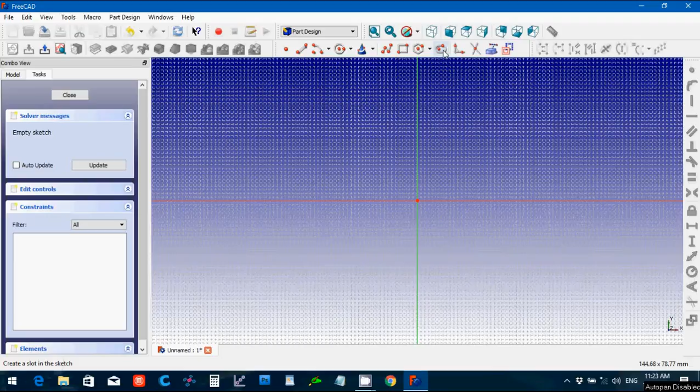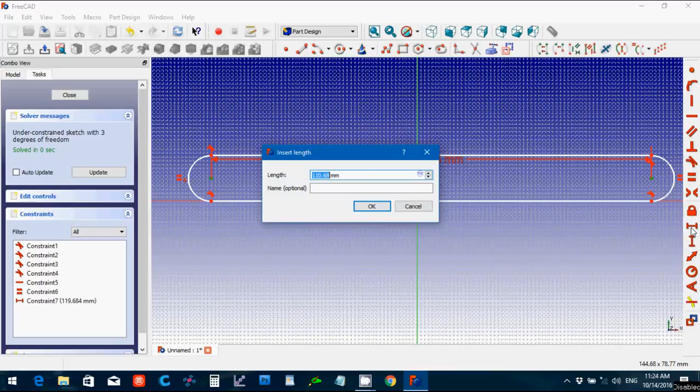So we're going to start out by creating a sketch, and I'm going to go ahead and leave it at the XY plane, and we're going to use the slot tool because it's the easiest way to create the original part. We're going to click here, and give it a distance of 304.8 millimeters. My number is now 304.8. Okay.

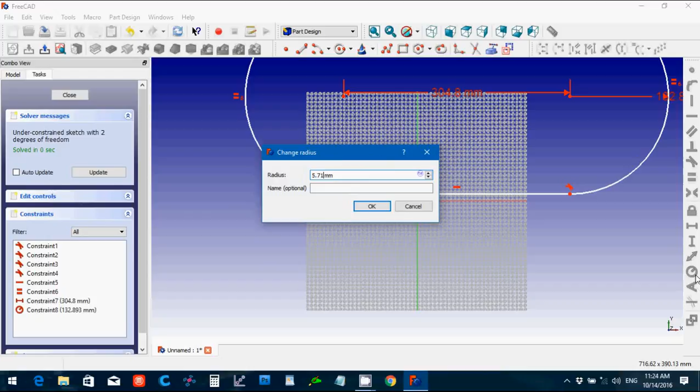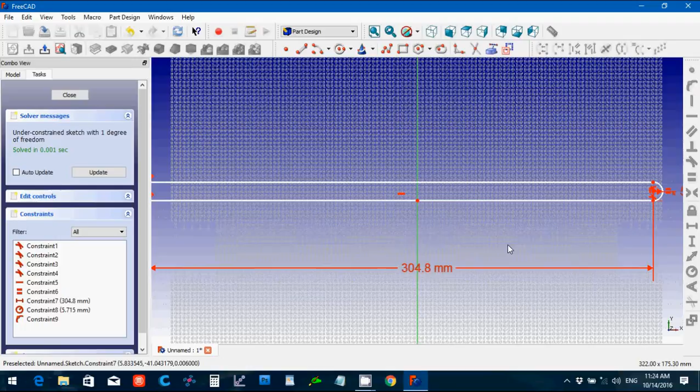Make it really big. We're going to set the radius on one of these to 5.715 millimeters. Now we can bring this back over here. I'm going to pin it to the, and then I'm going to go in, let's move this. So I selected that point, and now we're not done yet. That's just the outer part of it.

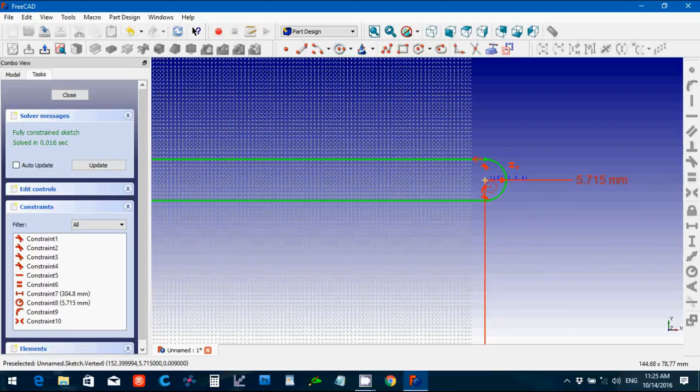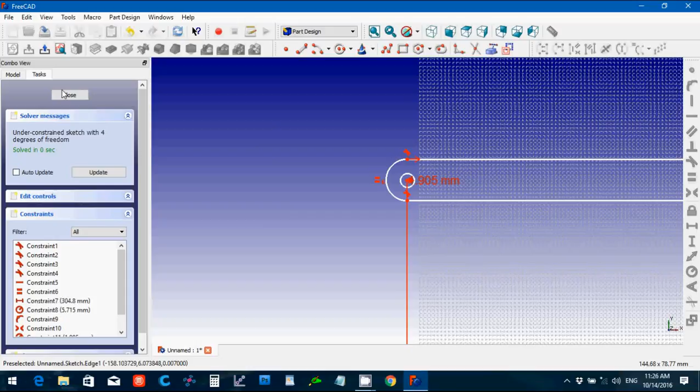We need to make two circles. One pin to that. We're going to hit escape. Let's go ahead and set the radius on that. And the radius of that is 1.905 millimeters. Now these may sound like really weird numbers, but they're all converted from inches. So set the radius on that one. 1.905. Then we can close that.

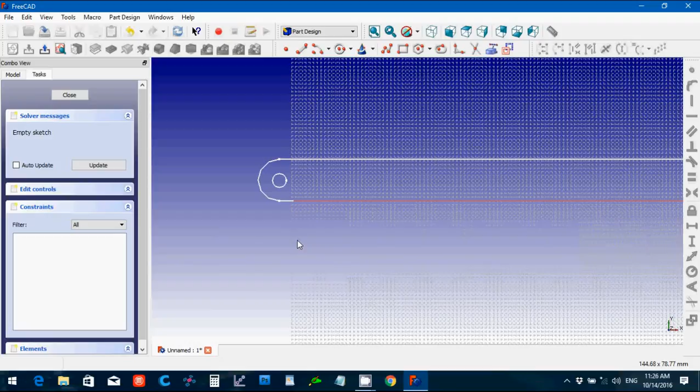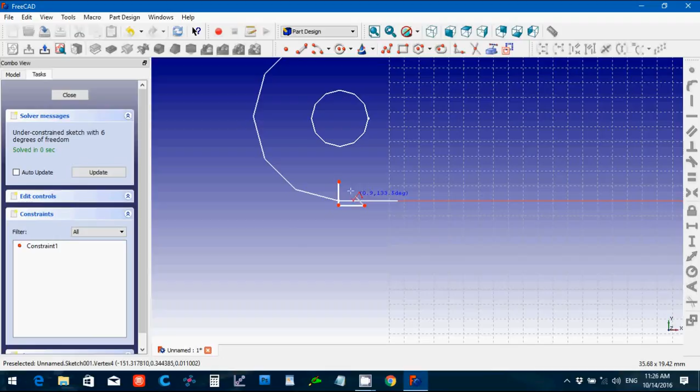And before we go pad that, we're going to create another sketch on the same plane. Say okay. Zoom in. Now I don't know why the grid does not zoom in with you, but it does not. We're going to create a triangle, and we want it to be right in line, as close as we can, with this, where it centers here. That would be the center of the, line up with the center of the circle this way.

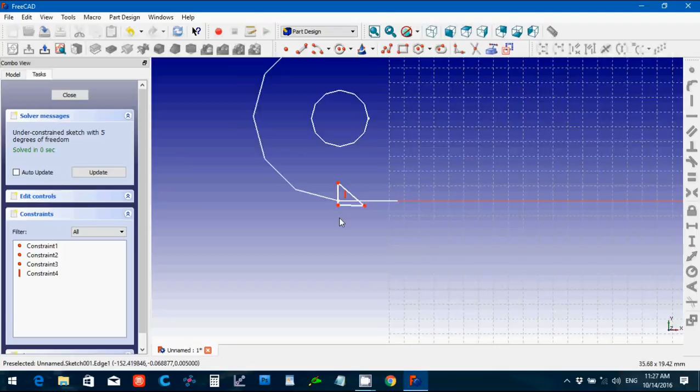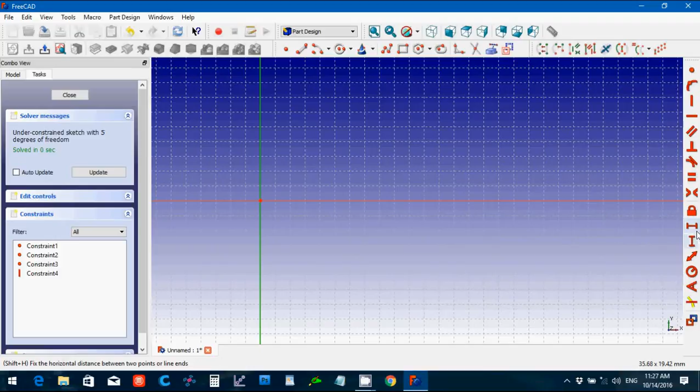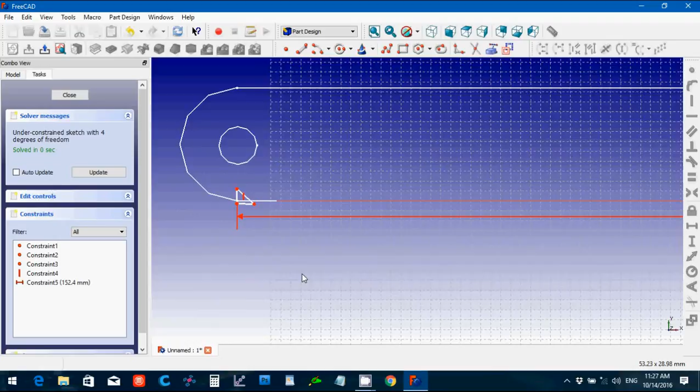Zoom in a little bit more. Make sure that this line is right there. In fact, if you wanted to, you could set it by doing a distance. You could click here. Click here. And it would be half of the 304.8, so 152.4, which I'm almost at. I'm only off by a couple. Say okay. That we've constrained it to that, which should be mathematically that exact line.

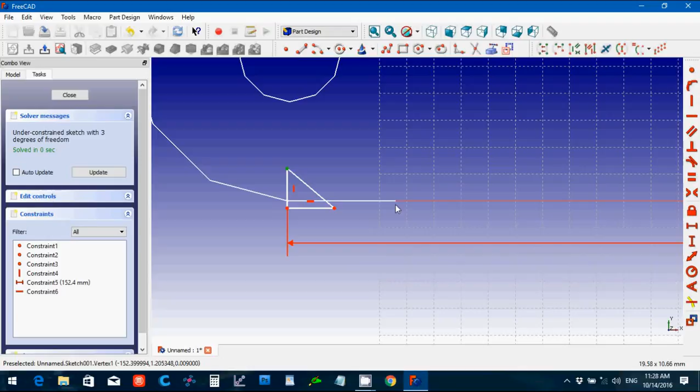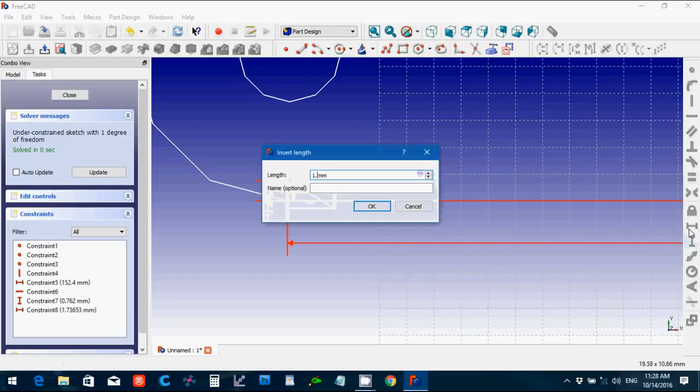And then, now the tricky part is you can set this to this height, and that is 0.762. And then we're going to set the length of this one to 1.27. And I'll bring that up closer to the... Now the fun part here is we're going to be changing this corner. We want to fillet that corner.

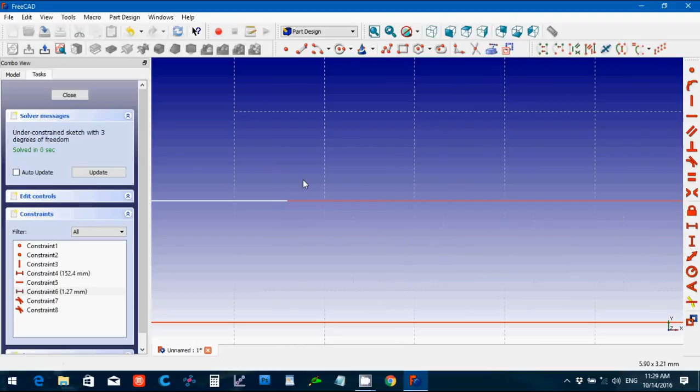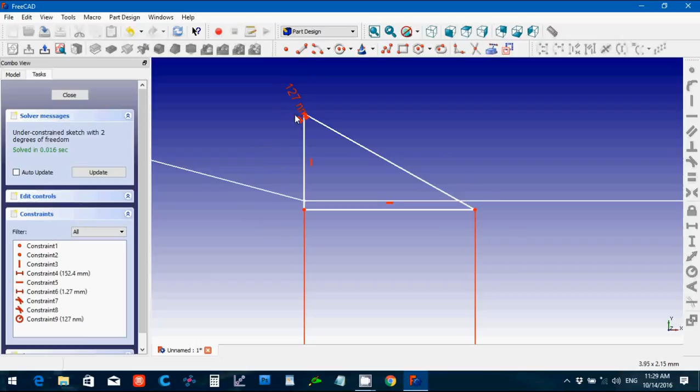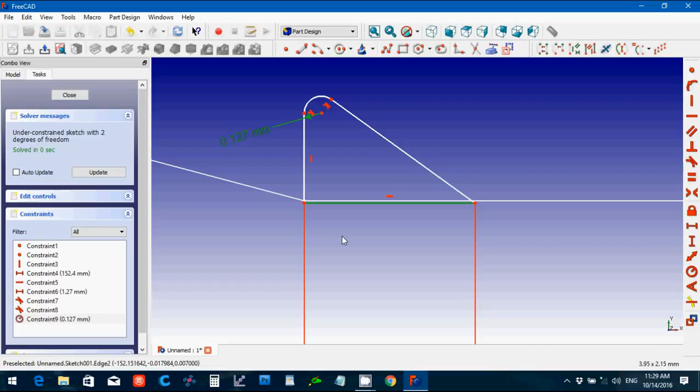And zoom back in. And we want this to be a radius of 0.127. Oops, what did I do? Oh, it changed it to nanometers, huh? Yeah, I did something wrong there. That looks better. Okay, I'm bringing this just right up close to where the line is. Okay, and we're going to close that.

We're going to take this sketch, the larger one, and we're going to pad it, and it's going to be 0.508 millimeters. And what I'm going to do is I'm going to click the face, go Part Design, map sketch to face, and then I'm going to say Sketch001. That places that sketch there on the face. Then you should be able to take that and pocket it. You can leave a dimension, or you can switch this to through all. Since it's so thin, it doesn't matter. So I'll go through all and say okay.

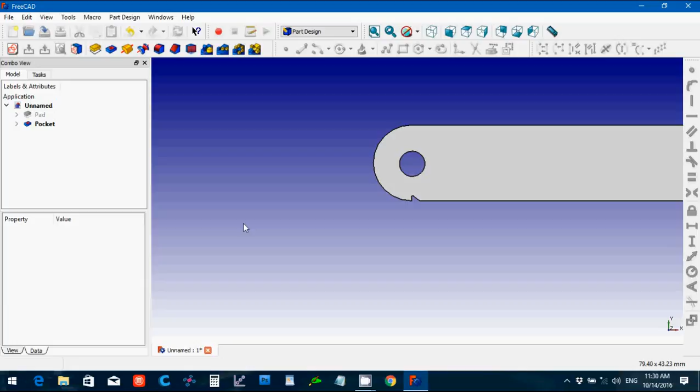Now we're going to try to create a linear pattern on that pocket. See, the length here is going to be the 304.8. And the number of occurrences. Now this is a fun one. This exercise is on page 113, by the way. I didn't mention that. But the exercise doesn't tell you how many teeth. So what I did is I took 304.8 and divided that by the 1.27, which is the size of the cut, and I got 240.

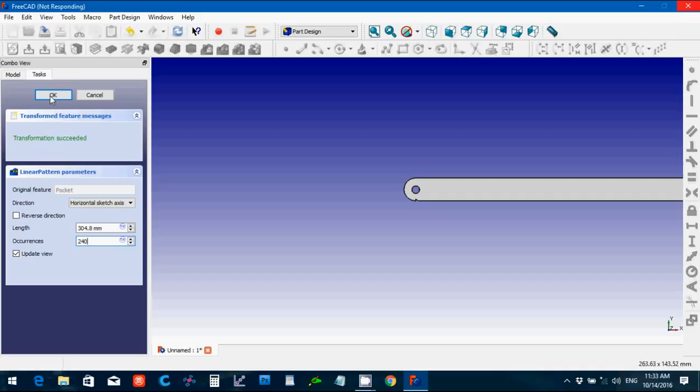And we wait. I'm gonna pause. Okay. So we now have a whole bunch of little teeth for the blade. So I'm just gonna file save. And I don't remember what chapter this was in, so I'm just gonna go Hacksaw.

Now, like I said, you probably wouldn't 3D print this, just go buy one. But it's just a principle of showing you how to use and model this item. Thank you for watching.